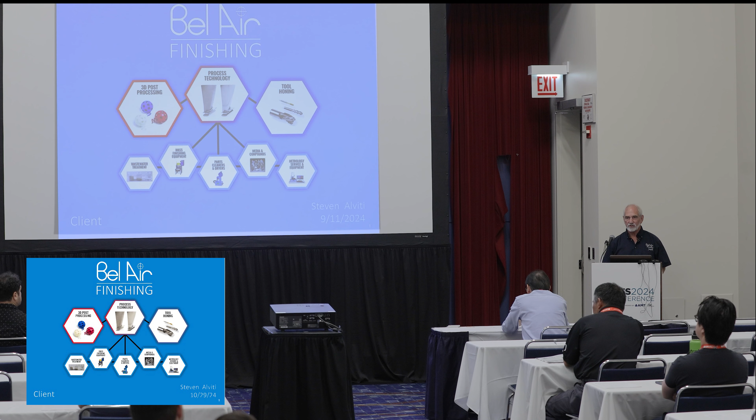My name's Steve Alviti. I am part of Bel Air Finishing Corporation. I'm the second generation of the company, and we're now in our third generation. We've been around for quite a while, and our expertise now is mass finishing, post-processing—another word for mass finishing in the 3D world—tool honing, and all the supplies for tumbling, cleaning, and blasting that go along with the process at the end of you guys making a particular part, whether out of metal, wood, or plastic. We're at the back end. We customize finishing systems.

The business was started in 1966. My father was the founder. Like I said, I'm second generation. He was part of the Navy, and he grew up in tool making, machining, and tool and die processing. He worked until he was 93 at his workbench. He went down and that was it, and everybody was happy about that, to be honest with you.

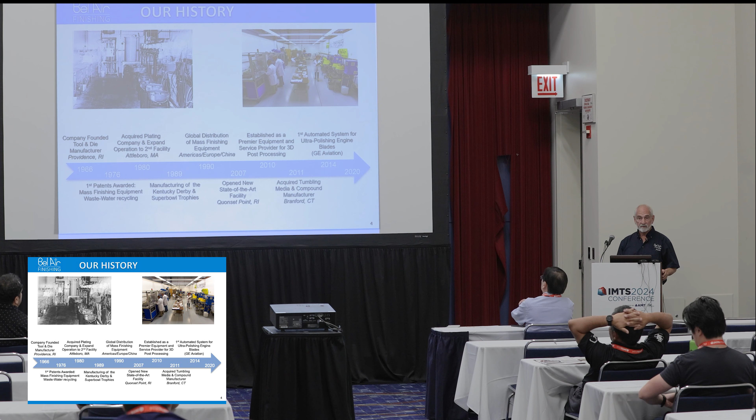So I'm second generation. Through the course of our business, we were involved in all sorts of manufacturing. So we're at the back end of manufacturing, but our background has everything to do with front-end manufacturing from the beginning. We've been in tool and die work, stamping work, machining work, die casting, and molding—that's where our background is. So anytime we look at a finishing operation, we look at it from the aspect of: if I was making that part, what would I do? What would be my options? So this back end of manufacturing brings us across all industries, and it's really cool because we get to see a lot of different products made different ways. All of this is our background that helps people develop a finishing process.

So before I get started, I like to know my audience. How many people out there are involved in 3D printing? And that's your issue, okay. And then how about traditional machine parts? Traditional machine parts, that's about the right average.

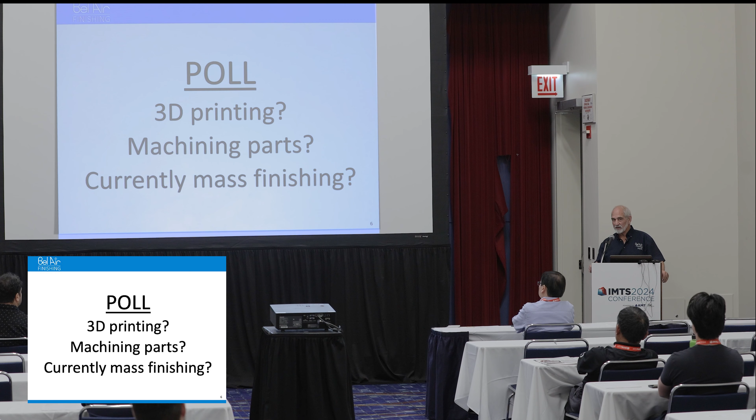How many of you are currently mass finishing? Which is another thing we're going to get to—the terminology is kind of all over the place. So we're going to set the stage to define some of the terminology we're going to be talking about, to have some kind of conformity in what we're presenting.

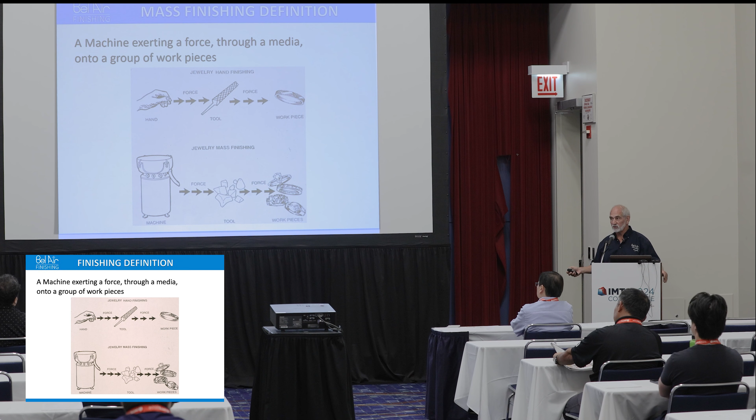So we're going to define hand finishing as the most archaic, we'll call it right now. Hand finishing is using your hand and exerting a force through a tool onto a workpiece. The next step of this hand finishing operation was to take it to another term called mass finishing. Mass finishing replaced the hand with a machine, and that machine is generating a force, and we replace the tool with something that we call media. Then we exert the force through the media into a bunch of pieces, or a mass of pieces—hence the name mass finishing. So that's where we're coming from.

One of the difficult parts of this presentation was that we have a conundrum, and the conundrum is mass finishing and automation and what those words mean to different people. So I gave a presentation to my engineering college, to a bunch of students, and I tell this story because it kind of fits in with what we're doing.

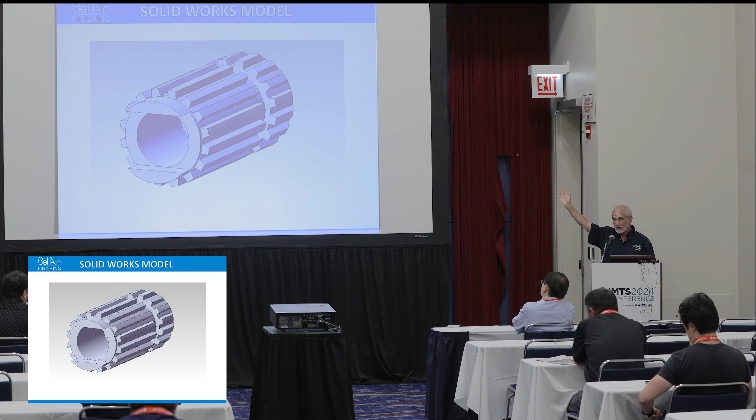So I have 100 students in the audience, and I asked them, how many of you can get on your computer on SolidWorks or any other design program and design this part? And they all raise their hand—yes, they can do that. So then I bring up this slide and say, how many of you can take that design work you did and put it into a 3D printer or a 5-axis machining center and actually make the part? Out of the 100, maybe 20 of them raise their hand—yes, I can do that. So then I bring up another slide and say, of the 20 that actually made this piece out of whatever material, how many of you know that there are 72 places on this part that will not allow it to function the way you designed it to function?

And they all have a blank look on their face, and nobody raises their hand.

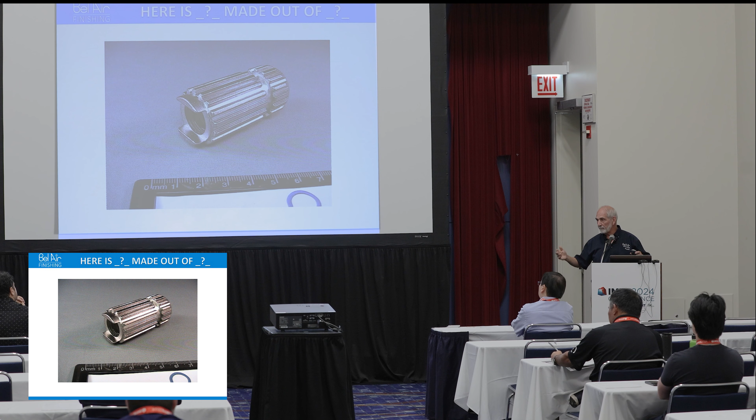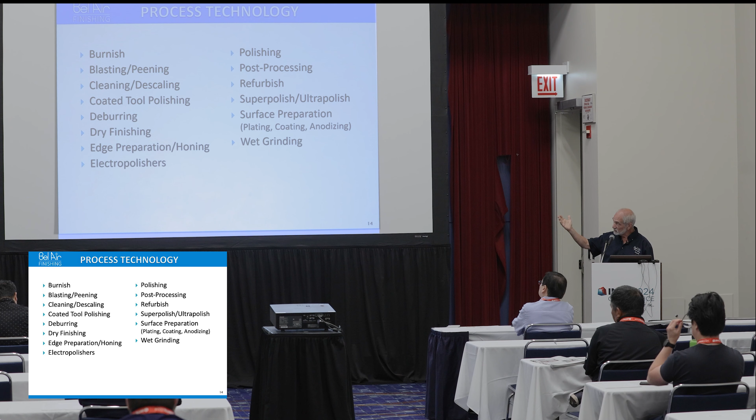My problem here in this presentation, to make sure I can help people, is that these are the kind of things you have to think about when making a product, as opposed to after you've already made it. So these are the different words and terminologies we use in this back end of manufacturing, and this is what we get a lot of times from modern day engineers.

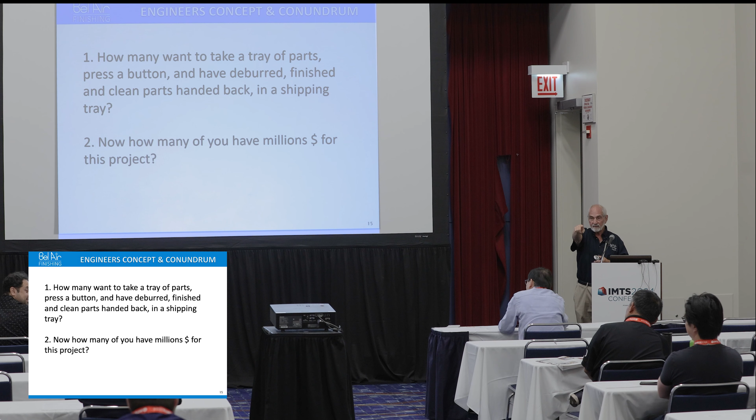We get the request to automate that process. So they want to take this and automate it. When we talk about automation, I ask, how many of you would like to take parts you make, put them in a tray, press a button, and have them come out ready to ship? Yeah, you want that. Okay, how many of you have $1 million to put into this one process to get these things cleaned and deburred at the end? Anybody? Okay, you're my customer right there, I want to see you after, okay.

So what does automation mean to you? My definition for this presentation is that we're going to replace some kind of hand labor operation with a process, or some other mass finishing operation, and bring it to another degree of automation. My goal is for all of you to come out with maybe one tool to put in your tool belt, so when dealing with one of these processes you're looking for, you have a tool from this presentation that may strike a question in your mind. My ultimate goal is to give you a tool for this solution of post manufacturing.

For the purpose of putting everything in perspective, I started off with hand finishing. There's ways to automate hand finishing, and that would be mass finishing, with a bunch of ways to do it. That's the low level of automation. Then on the other end, there's more aggressive, more expensive, more complicated ways to automate, using robotics, CNC, vapor honing, and combinations of mass finishing and robotics.

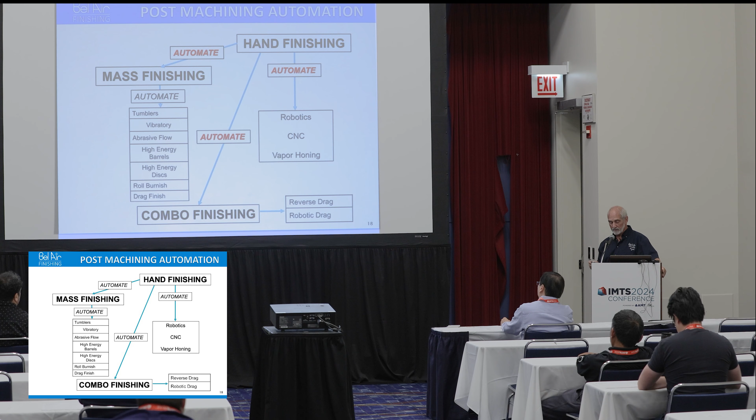So we're going to go down these two paths, and I'm going to show you a bunch of clips of tools doing things, then get to some specific field solutions, and hopefully you'll have some ideas for your tool belt. At the end we'll have questions, so if you want to make notes, we'll have questions at the end. That's the procedure.

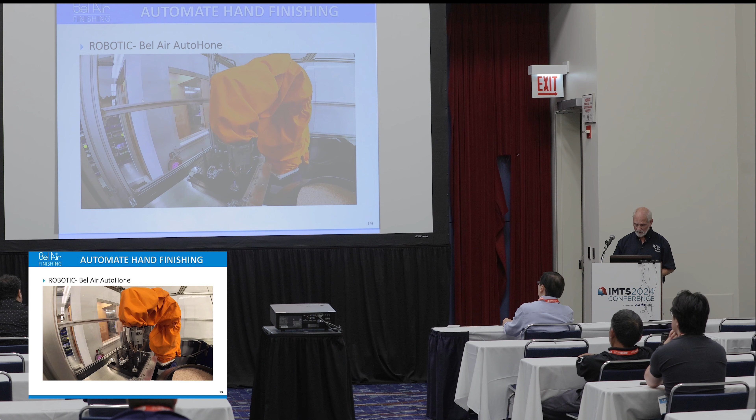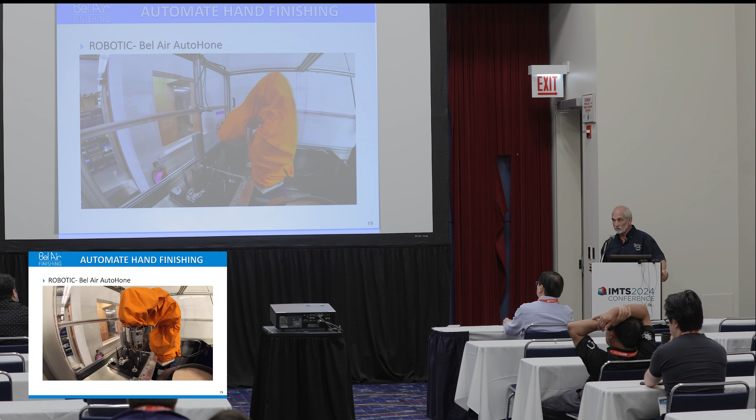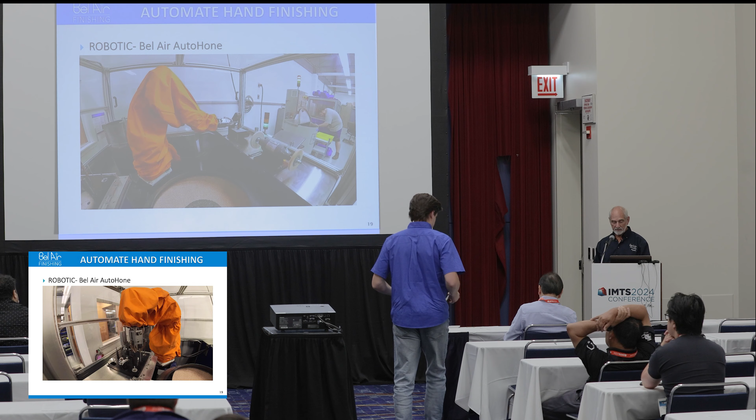This happens to be a single operation with many types of parts, short setup time, a small cellular operation. You're taking a robot, coming from a pallet, and doing whatever kind of operation you need to duplicate what's done by hand. A rack of parts go in, you press a button, walk away, and the machine does its operation. That's called single operation robotics.

The next type takes that further with robotics, where each robot does an individual operation that a hand person would be doing. First stage does one belt, second stage does another belt, third stage does another belt. So this is a complete, totally automated cell. You can imagine the difference in cost, setup, and the real estate it takes up. This is totally robotic finishing.

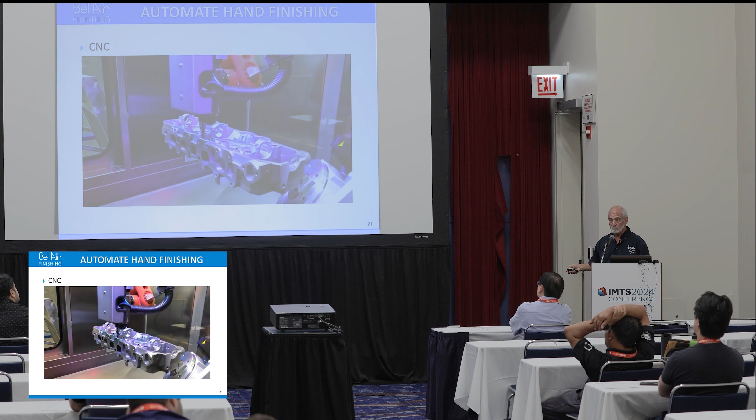Now this is taking a CNC, essentially a router with a deburring tool, set to go around the part and do a 45 degree chamfer all around it. Then the part rotates, and you do the same thing again. So this is another way of totally automating the process.

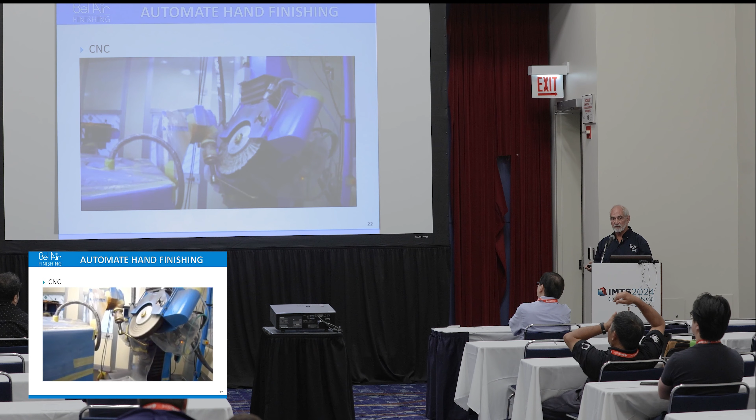So now another way of automating by CNC method: here's your part, you're putting it on an arbor, and you're rotating the part, and then you have a wheel that's CNC programmed to move in the direction needed to do that hand polishing operation. Again, these are just short clips to give you a general idea. This is high volume - this company does these parts day in and day out, year in and year out, by the thousands.

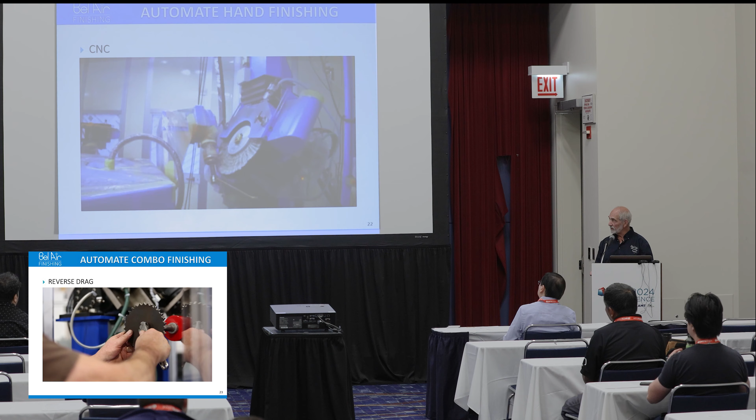Another method is making a combination of some type of robotic action with a mass finishing action. So we have a part, we're fixturing it, and we're using hydraulics to move the part through what we'll call a form of a tumbling operation.

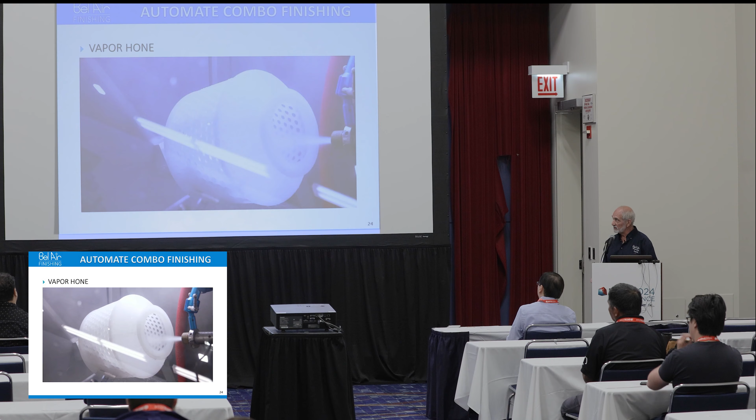Another way of automating - this is automating a blasting operation by taking a rotating basket, putting a bunch of pieces in a basket, pressing a button, and now we're honing and cleaning these parts in a mass, so to speak. That's called vapor honing.

Then we can take the robot and combine it with a type of mass finishing operation, and we use the robot to manipulate the part through what we'll call a dry polishing belt. It's actually the mass of media traveling across the surface, and we pick and place and orientate it.

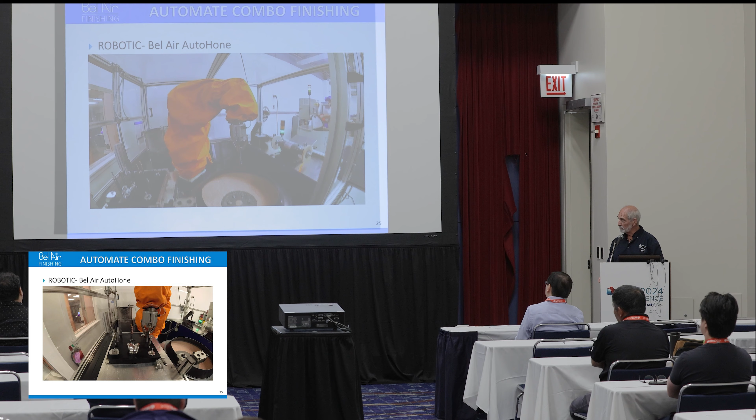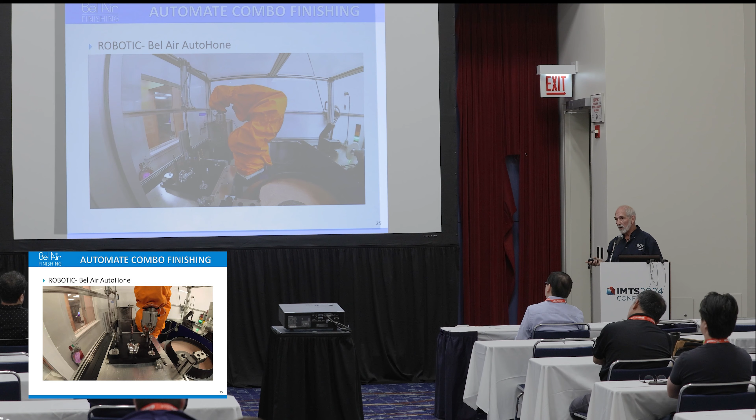When we're doing robotics like this, you see the difference between this robot and the one that was in that multiple cell. The size of the robot really depends on what kind of pressure and forces you have in the finishing operation. You'll notice this is done in a dry operation - if you went to a wet operation with high torque on the part, you'd have to triple or quadruple the size of the robot. So there goes the expense, up and up.

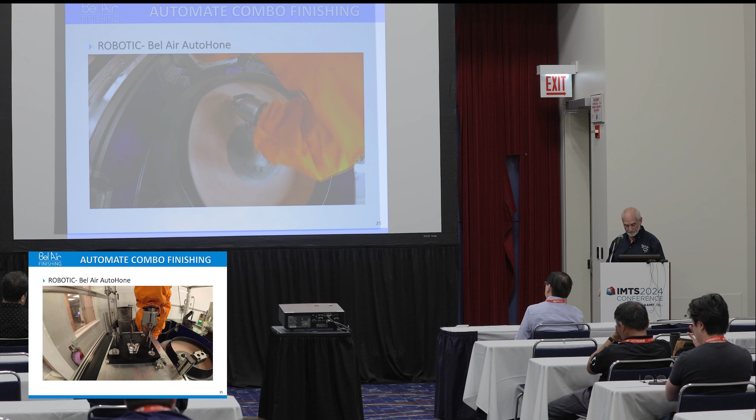So this is another example of a cutting tool with the edge being honed, going into a tumbling process.

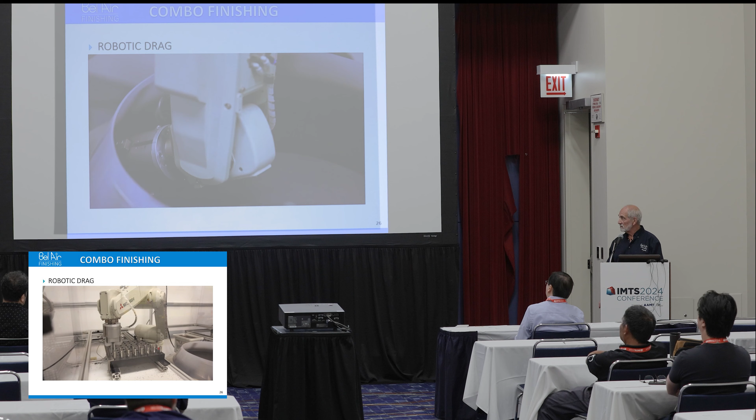So generally speaking, we went down this right side and showed you different ways to automate based on using robotics and CNC - that's kind of the upper end. Now we'll go down the left side and look at mass finishing ways that are simpler and usually less expensive to automate processes.

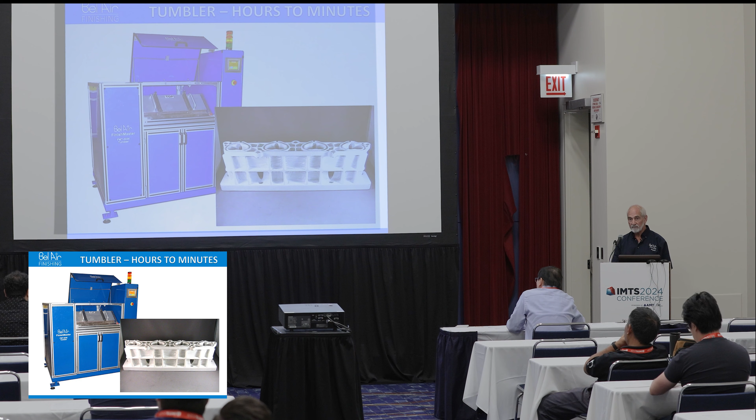Here's a tumbling piece of equipment that was manufactured for depowdering a 3D printed casting model. This was printed, came out of a powder bed, and a bench worker had to use a toothbrush and clean this part totally of the powder - it was hours of work. So automation is taking the part and putting it in a tumbler, using the correct combination, and cleaning the part. So now it went from hours of operation to minutes of operation to load and unload a part.

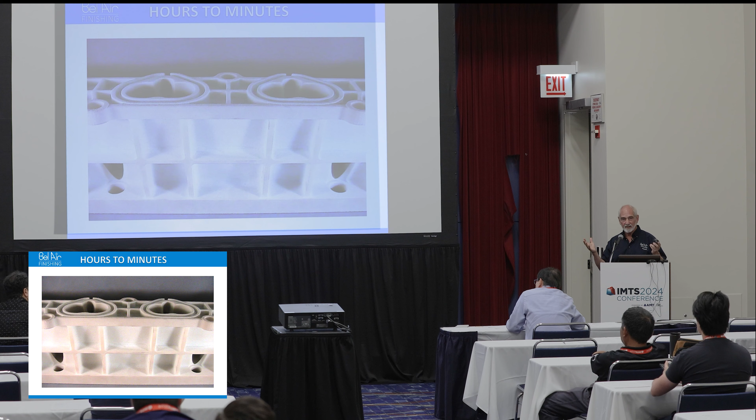So am I on the right track? Is that a form of automation for how you guys look at it out there? That's a way of automating, right? Okay.

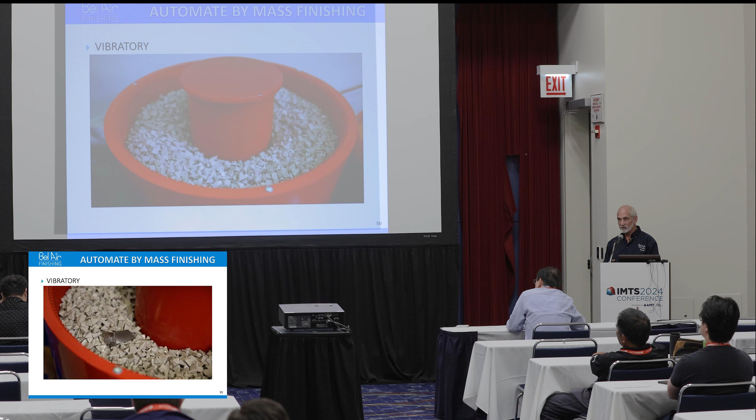Then we go to vibratory finishing. Again, this is taking one part that they were grinding by hand and now putting a bunch of parts into a vibratory finisher, different sizes, and now you've got a person that loads and unloads a batch instead of sitting at a bench trying to grind the surface.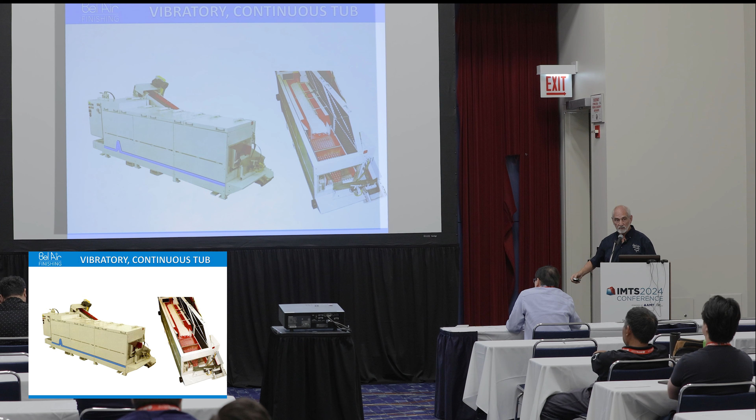This is another form of vibratory finishing called a trough machine, where parts go in one end - it's a short cycle, they throughput and come out the other end. So you're putting parts in as you manufacture them, they go through the process, they come out the other end, media returns up to the top and continues a loop in this process. That's called a continuous tub vibe.

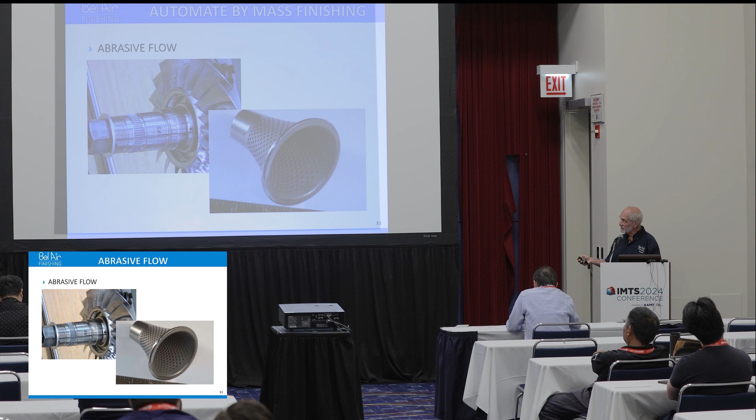Another means of honing surfaces - this machine pushes and pulls an abrasive putty over a part surface or through internal channels. So we're taking the handwork of smoothing out a surface and passing parts like this internally through these holes, across these blades. We're taking the handwork out of it by extruding a putty through the part and honing the surface. So that's another method.

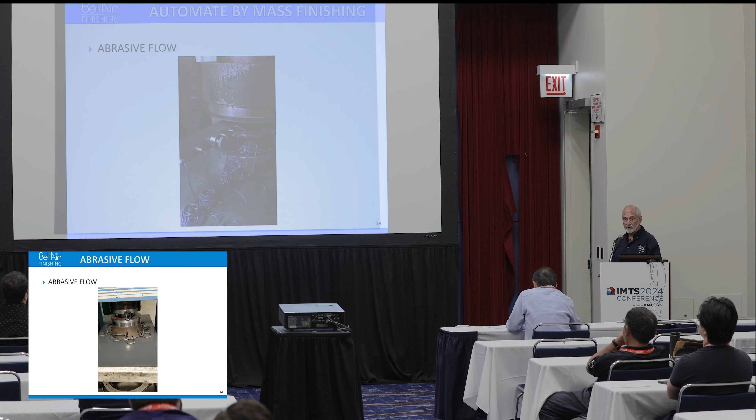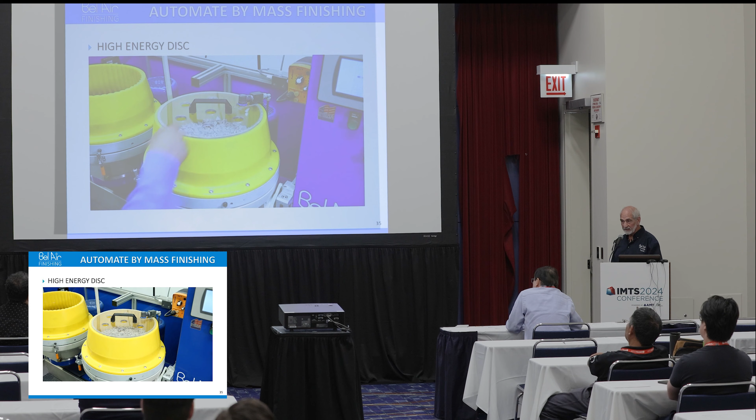Another method is taking vibratory finishing, which we call 1G force of finishing, and we now add centrifugal force and high energy, and we're able to reduce cycle time, make one flow-through processes, and lean out the product. We also improve the productivity of what a vibe would do by being able to use smaller media at a higher energy. So that's another method.

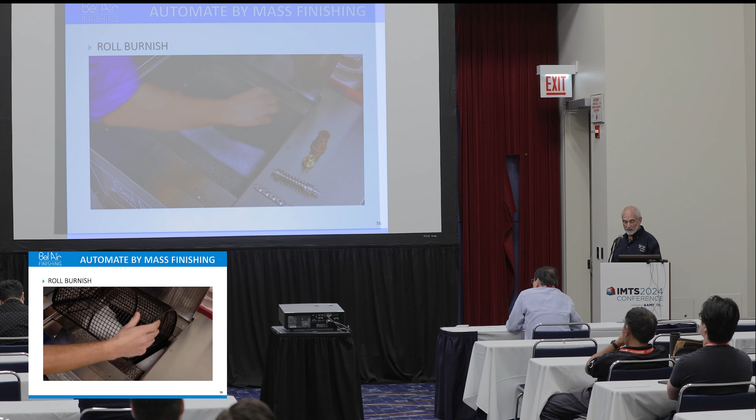This is a burnishing operation showing parts going in as a mass and then coming out as a mass, doing a burnishing or polishing operation.

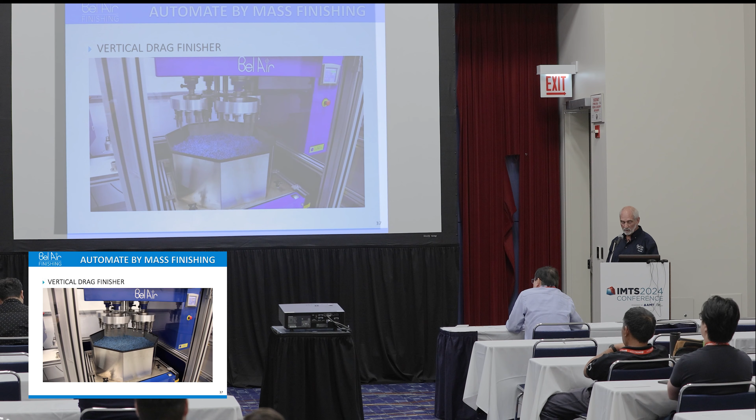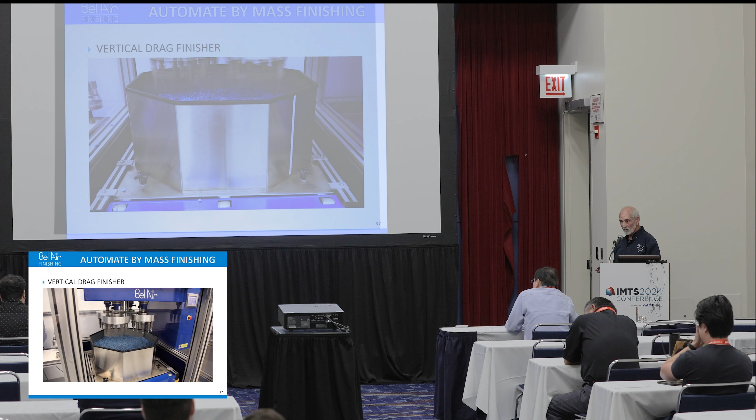Next, we show automation by vertical drag finisher. Parts are loaded on a rack and rotated through a tub of abrasive or polishing media. This particular machine processes 40 parts at one time, with about a 5 or 10 minute loading process - that's the labor involved. As well as taking the labor out, we're also reducing the skill pool needed. Now it's load, mount, press a button, and we're doing an operation.

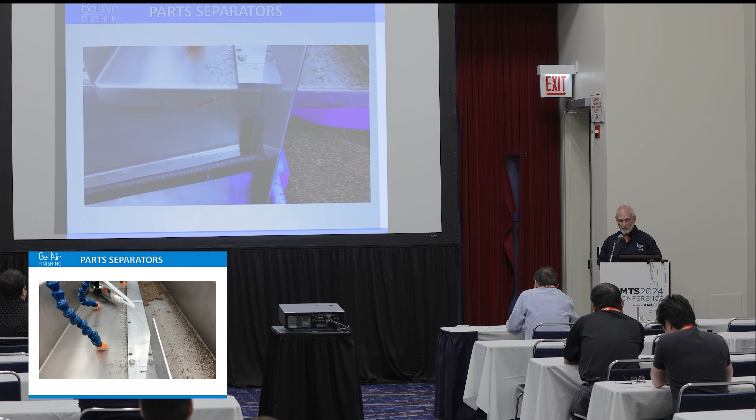Another thing I'd like to mention is sometimes in a process, you're using a media and a type of machine, and you get into a process where your media and your parts are the same. That's another automation of the automation - we're separating parts automatically here, with parts coming out on the left and media coming out on the right. That's another form of automation, another tool for your tool belt.

So those are the general tools we talk about when going from archaic to whatever kind of improvement we're making in automation. Now I'll go through a couple of samples of how we get started on a project, and show you some real samples that are happening - real production products.

There's a 5-step process we use for figuring out how to automate. We analyze a part, then develop a range of automation options. The trick is to match one of those with what we call your company culture - how many parts are you making, what kind of skilled labor do you have, what are you trying to replace. Then we choose one of those methods to automate the process, go into a lab, take those processes and parts, develop an actual process, and present a system to solve that equation. That's the general process.

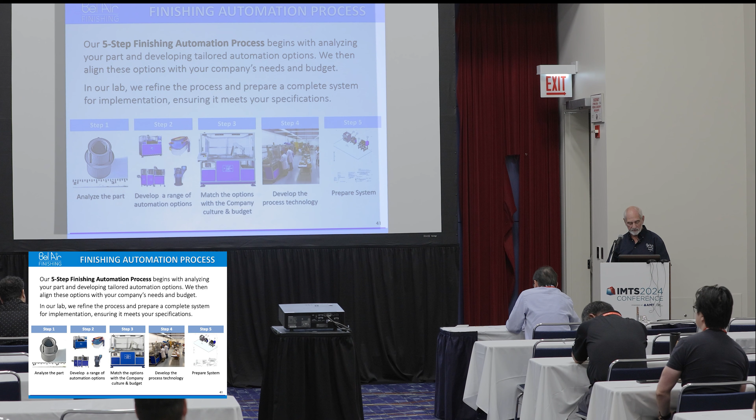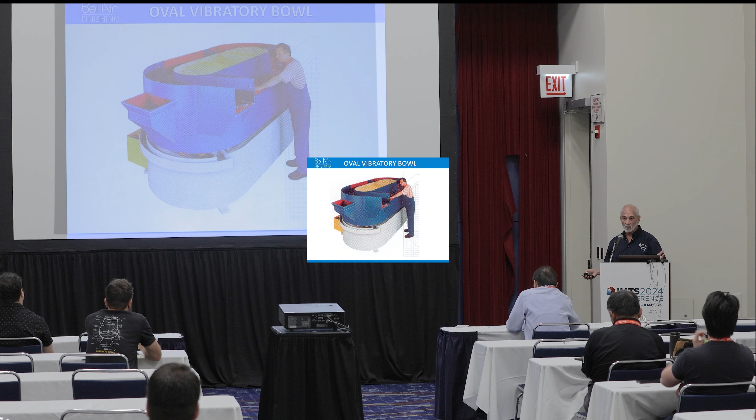Here is a machine, a vibratory machine, made for throughput - a 1-pass machine. It's a short process. The parts go in one end and come out the other end, about a piece every second. Simple form of automation. And that's the resulting part on the end.

This is another part - a pill punch used to form pills. During its life, it needs the end repolished as regular maintenance because it gets gummed up. So there are several ways to do this.

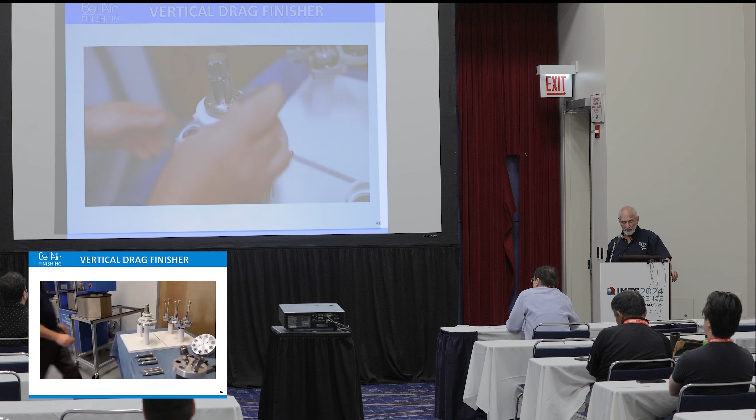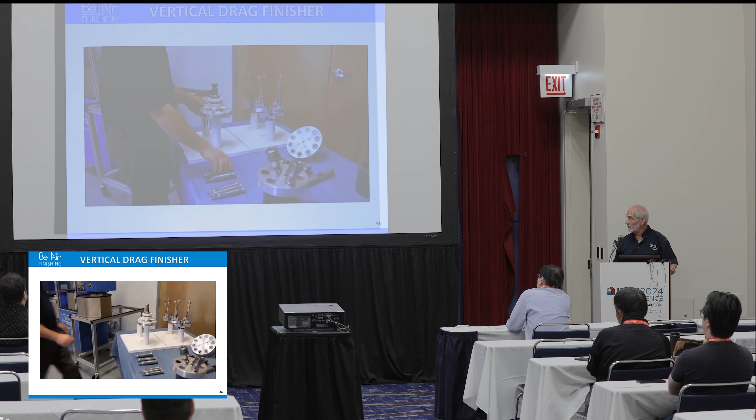Here's a simple method: we're racking the parts with a special rack design for them. The parts go into a drag finisher, pushed through a polishing, then they're unracked and done. That's one method. We show a second method - now a company has more productivity than they can handle, they want to get more automated, so now they go to inclusion of robots with the mass finishing operation. So that's two entirely different ways to automate.

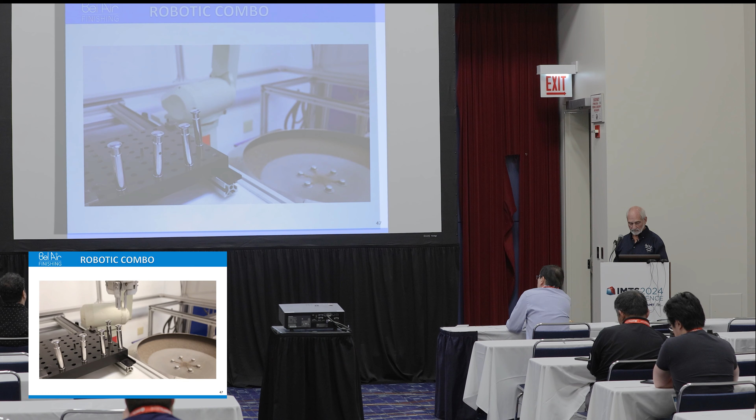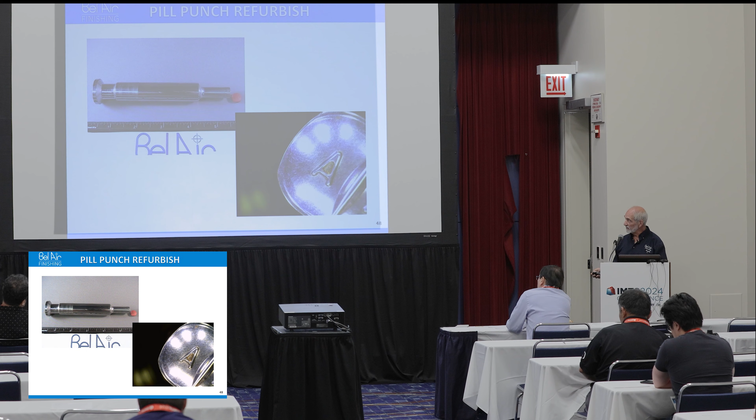And here's the finished end of the part. You can see it's not just the cylindrical part, it's also what's stamping on the end, the polishing on the end - and that's what the robot helps with.

This is another interesting project we worked on - this is Pokemon dice. On the left is the part as it's molded. This company wanted to take production back to the US from China, and they needed a more automated way to fill in the dots. Where labor is very inexpensive, each one of these dots is put in with a needle of paint - we couldn't do that in the States, so we had to figure out a way to automate it.

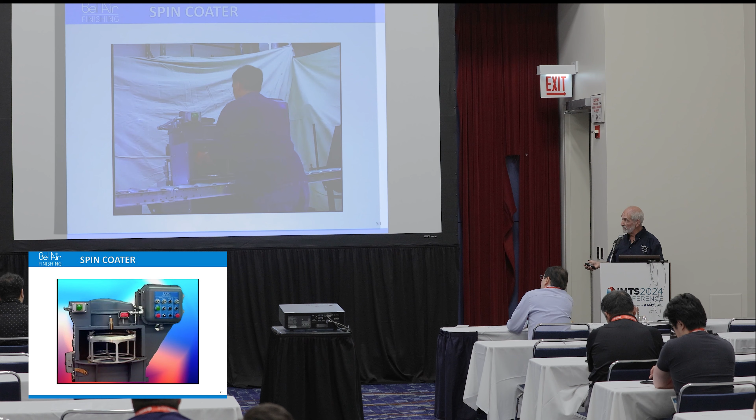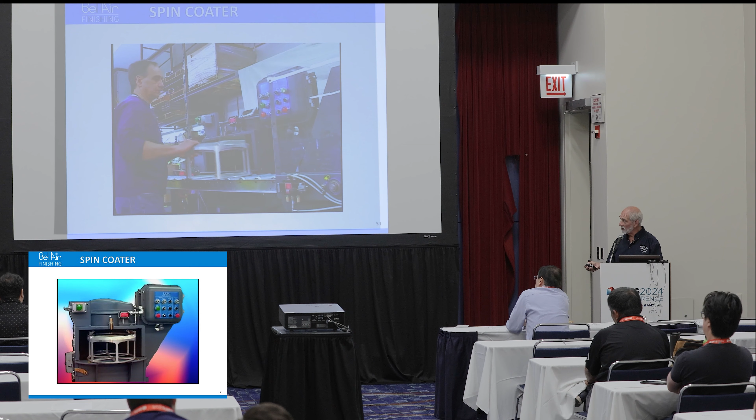So we took a batch of the parts and put them into this basket, dunked the basket into paint, spun it and dried it. While doing that, we set up an automated cell for it. The parts are dipped in, spun, come out in a batch, get dumped and reloaded for the next batch. Now the part comes out full of paint, all filled in. We go into a vibratory operation, abrade the rest of the paint off, leave the paint in the parts, and now we have a completed dice.

All right, it's completed anyhow. So that's another automation process.

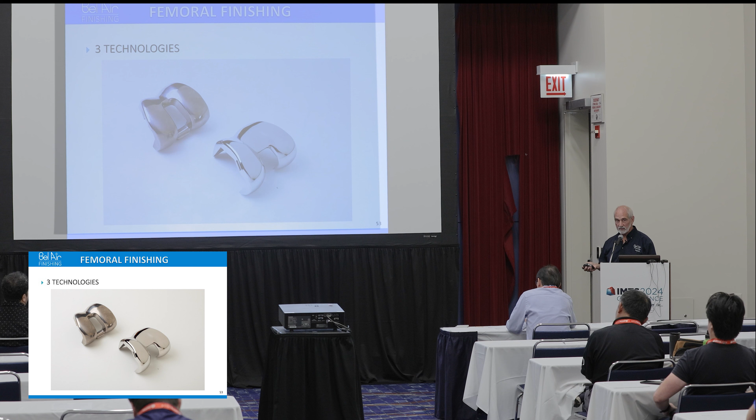This is an interesting story. We'll show three different technologies, but this happened about 15 years ago. One of the major manufacturers made this knee implant. Anybody having problems with their knees may get one of these one day. Hopefully it'll be finished by a Bel Air machine, because those are the best.

The customer came to us and they were hand finishing, and they decided hand finishing wasn't the way for them to go. So they went to robotic finishing. Their cell mimicked what a person by hand was doing, so you had one robot going to one belt, another robot taking that same piece and going to another belt, and another belt.

What they figured out in the end is that the robot didn't do any more than a person would do. Furthermore, the robot manipulates the part in a pattern, a CNC pattern that's programmed. So the parts would eventually get done, but when they came back to the end, the robot didn't see little imperfections in the casting, so it didn't put extra effort into it. Probably 50% of the parts done in the cell had to be redone by people on the bench. So in this case, the idea of robotic finishing didn't work.

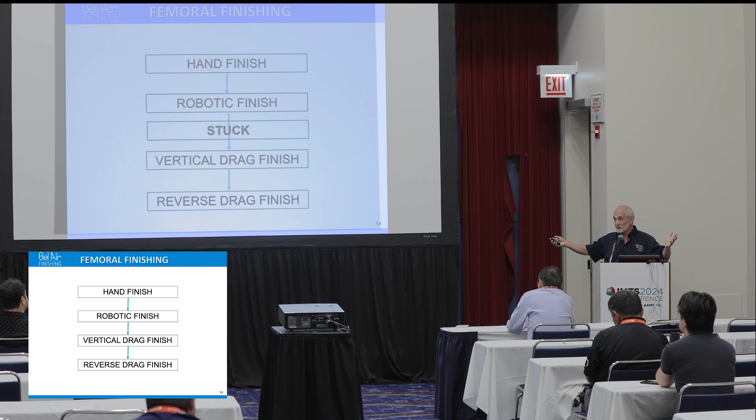Because of the effort that a person can do, they were stuck. Every time they wanted to add productivity, they had to have a room half the size with a robot, and they didn't get any more than a person's productivity. So they were in a pickle.

So what we did was work on drag finishing operations. We mounted a bunch of parts at a right angle and rotated them through a mass of media. We did this three times and came up with a solution that was adopted by almost everybody in the world.

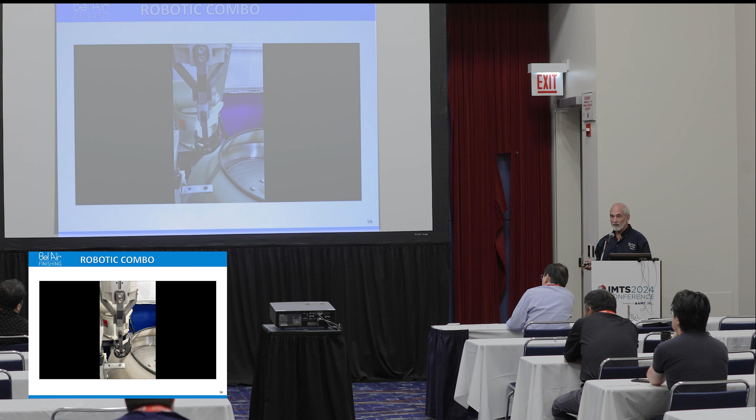Then we went further and said, let's do a polishing operation. Let's improve it by taking a robot and getting better manipulation of the part, better manipulation with regards to the polishing media, and let's polish it faster this way. That was another generation.

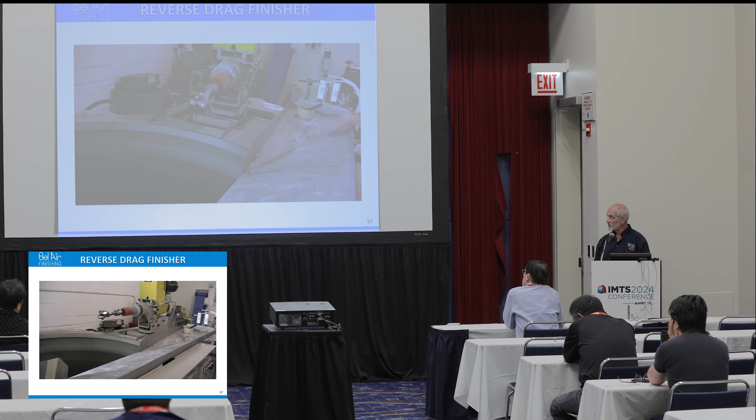Then we said, let's take the robotic out of it and take the reverse drag finish, where you have to mount pieces on an arbor, and do one piece at a time, ten times faster, then go on to the next operation. This was the third option of automating that polishing process.

Another part you may recognize - this is a gun barrel. It's made out of an assembly of two different machined parts with two different surfaces. Prior to the coating process, those surfaces had to be blended to be the same, so you'd get the same look after the coating was done.

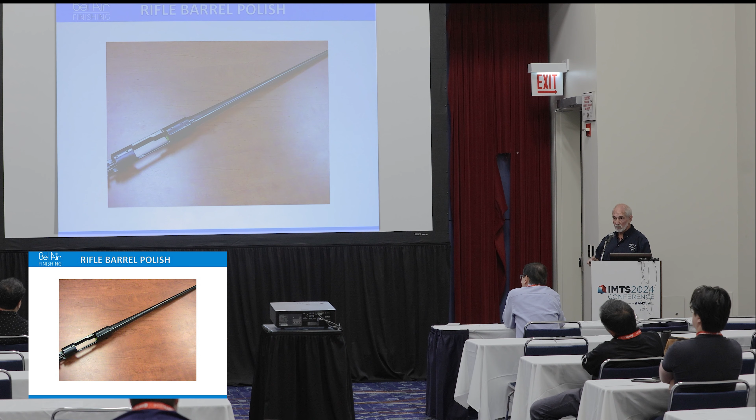Our first intent was a drag finisher, but we ran into a problem with the vertical drag finisher because the part was too long and you'd get variation in the finish. So we took a vertical drag finisher and laid it down, making what we call a horizontal drag finisher, so we could load parts the full length and get an even flow across the product.

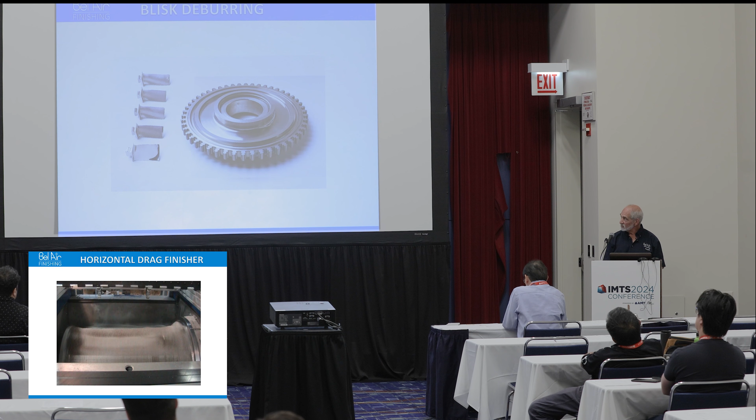I don't know why it's not playing. This is laid out - the parts are in here, inside the media, and they rotate through a mass of media, rotating on their own axis. So that was an automation process.

This is a disc that blades are mounted in for aircraft engines, and you see this pattern broached along the edge - we call it a Christmas tree pattern. This came off a very extensive automated broaching machine, and a person had to sit there with files and file around all of those edges.

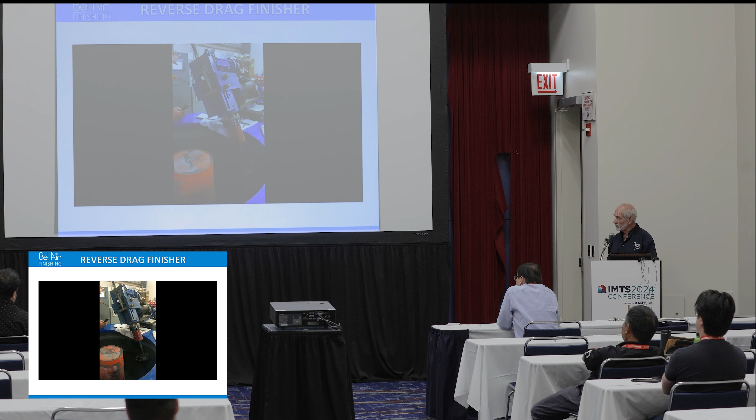So what we did was create what's called a reverse drag finisher. We mounted the part on the drag finisher, then rotated the part through the media while turning it and orientating it.

This went from a 7-hour deburring process to the person's actual time on the product being about 5 minutes. So that's another way of automating.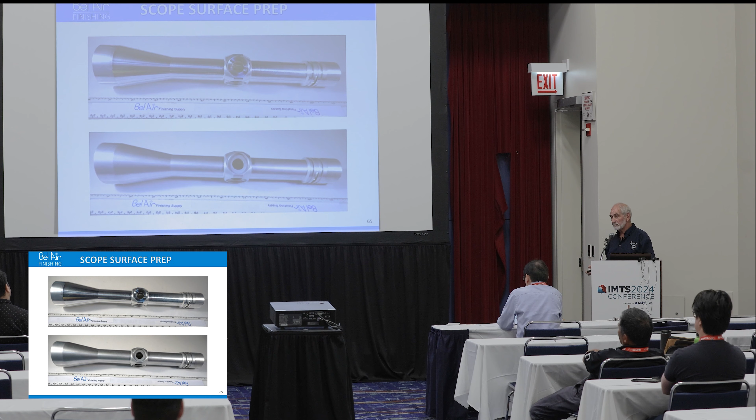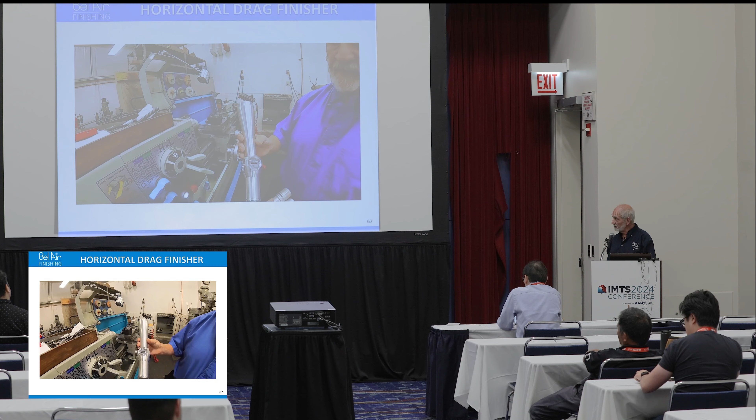Another product done on a CNC lathe had machining lines removed and surface prep done before going into an anodizing process. It's a horizontal drag process, parts taken from the lathe finish. What was being done before was going to a belt sander individually.

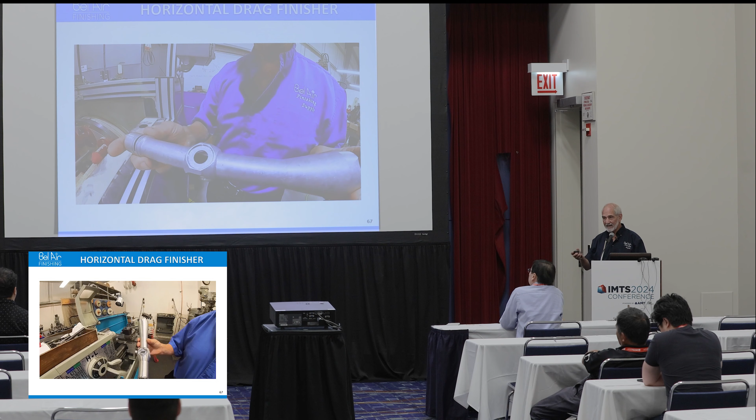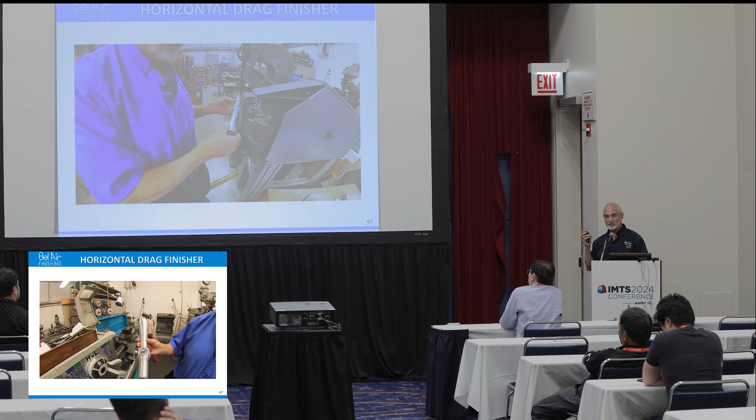Instead, now we put it into a holding fixture and rotate the parts. Another thing added to take it away from mass finishing, where you take 10 parts and finish them, is we programmed the machine to have a takt time. So for every 7 minutes a piece came out of the CNC machine, this part would be done one at a time. An operator puts one in, takes one out. That's another way of automating.

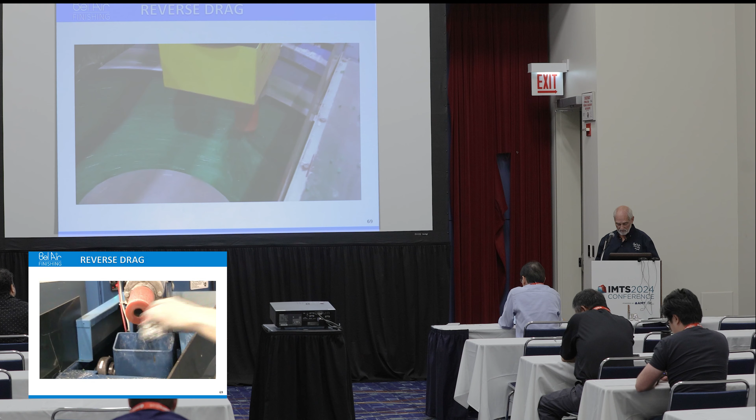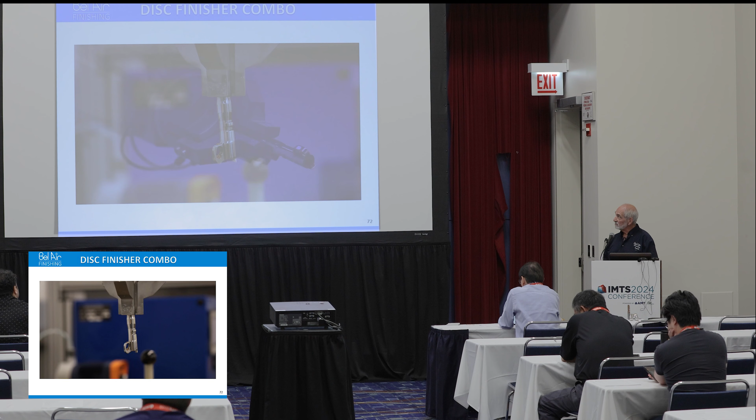Another process for automating. A couple of processes for automating gun barrels. We're mounting them on a drag finisher, or putting them on a disc finisher. We're honing the bullet ramp here automatically. Same thing, multiple operations. I'm running out of time, so I'm going to hustle.

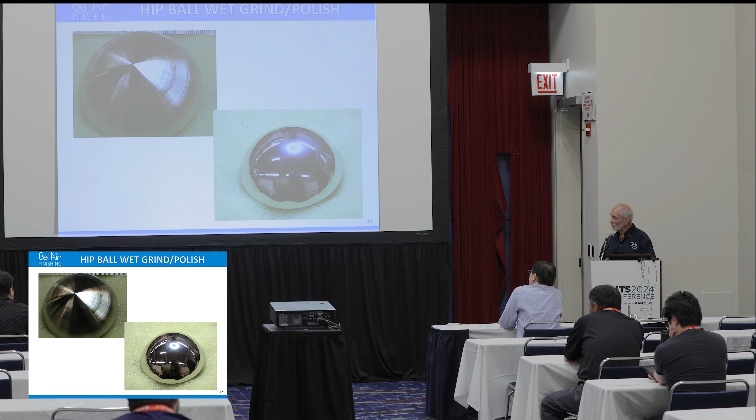Taking the polishing, 3 polishing operations, 3 steps of polishing a hip replacement, done in a barrel finisher. Automating the removal of powder on a mass of parts.

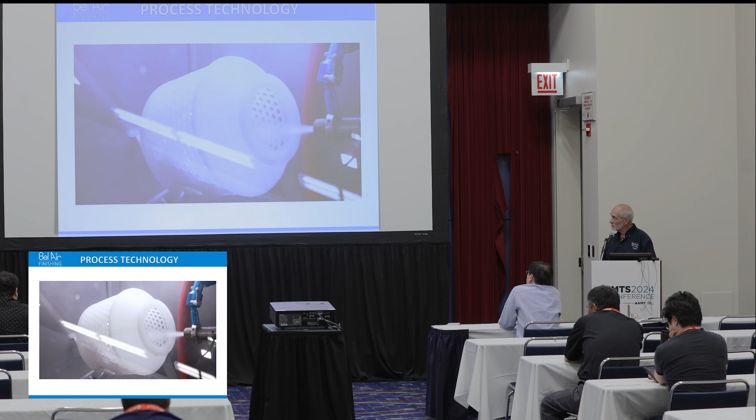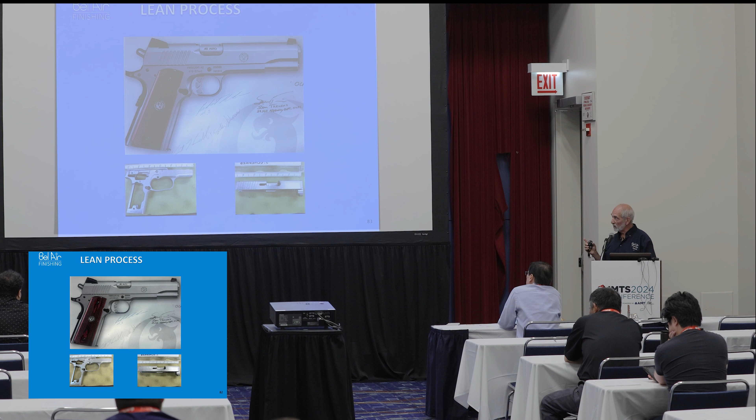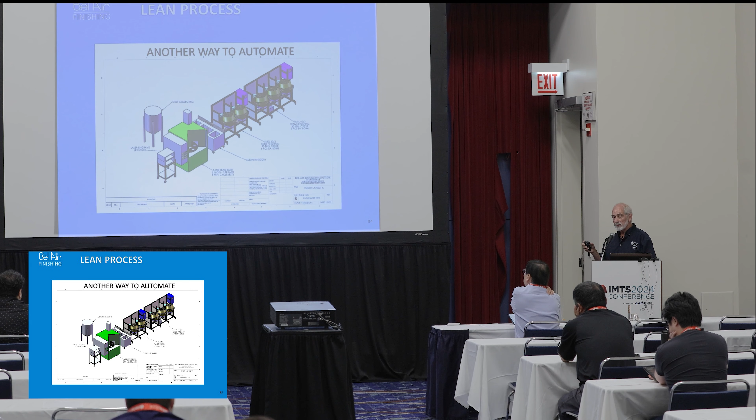Another way of automating that I should mention is not only the actual finishing operation, but also setting up cellular operations, which increases your productivity. Here's 2 parts to a pistol, and the setup was to go from the machining center to a high energy disc finisher for the frames and slides, then to a cleaning operation, then a blasting operation, and then a laser operation. So not only automating a system, but also automating a setup within your factory.

Here's another one set up for automating and putting in line. Multiple steps are done, then rinsing and going on to another operation. Those are cellular setups that can be designed based around your company culture.

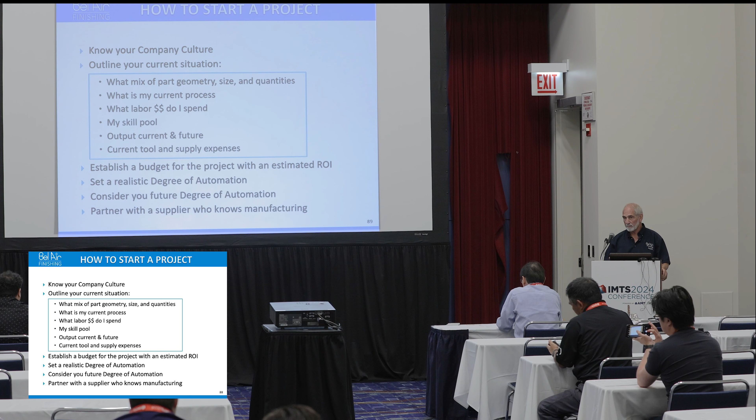So this is what you have to think about when you want to automate. These are the things you have to outline before you say, hey, I want to automate this process. And the bottom line is partner with a supplier who knows about manufacturing, because it's not only the finishing operation, they have to understand what you go through as a manufacturer.

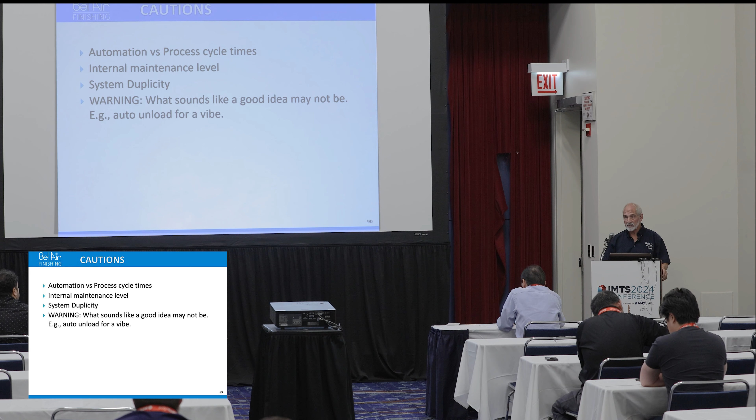Be careful when you choose automation that your company has an internal maintenance level to handle that automated equipment. Think about system duplicity. What happens if that system goes down? What do I do? Sometimes what sounds like a real good idea may not be so good, so be careful of those things when you start talking about automation.